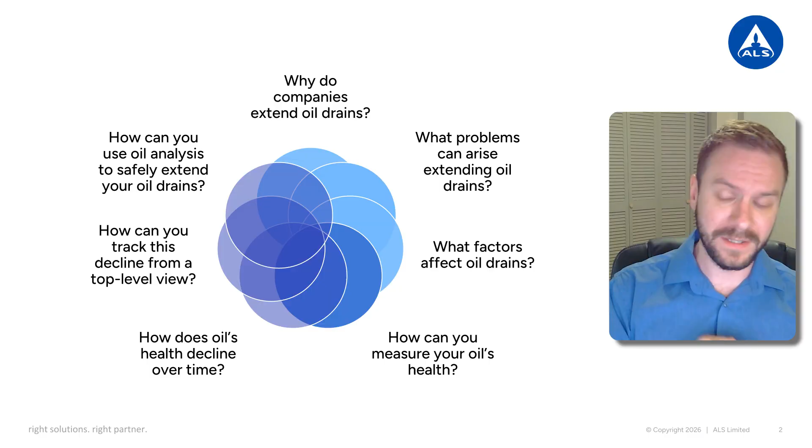But before we get into all of that, we need to touch on a big reason this topic is becoming more prevalent and why you should be paying attention to the topics covered in this webinar. We have heard countless news stories on the price of gasoline since the beginning of the year. It is no secret that the volatility in geopolitics has an effect on gas prices, but an often overlooked area in the media is lubricating oil.

Regardless of the reasoning, price increases at this level would make any company start to consider how to cover costs and overhead in lubricating oils. Indeed, many customers have already been starting a trend towards silently extending their oil drains. Doing so without understanding the mechanisms that limit these extensions, unfortunately, is a recipe for disaster. But there are many reasons one would want to extend their oil drains even outside of the price increases.

For one, it decreases waste disposal costs. Whenever oil is changed out, it must be disposed of in a responsible manner, whether that be through oil recycling or disposal. These oils need to be transported and dealt with. Reduction in the frequency you have to do this is a save on bottom line relatively quickly. Likewise, if you are decreasing the amount of oil you're using, you're going to find the overall cost of your lubricant going down as well.

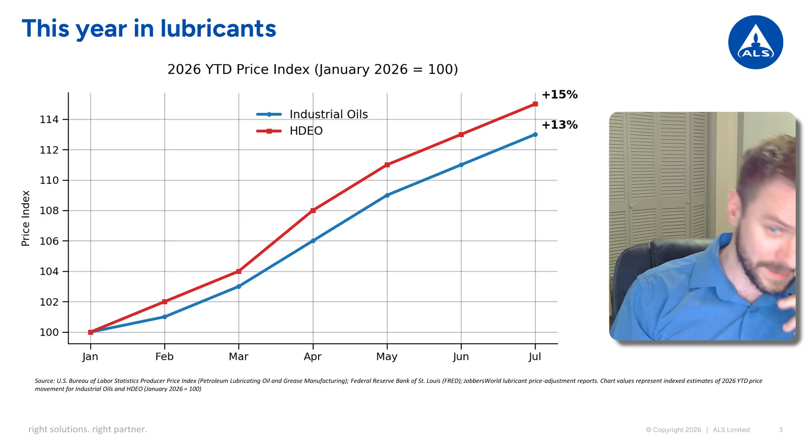Finally, environmental concerns should also be taken into account. If you live in a state, province, or country with carbon footprint regulations, the decrease in oil usage can increase the environmental sustainability of your company. These are just some of the benefits, and we can go into more, but there is somewhat of an elephant in the room: reliability. Increasing drain intervals is a goal that both consumers and oil producers alike strive for, but you cannot increase them indefinitely.

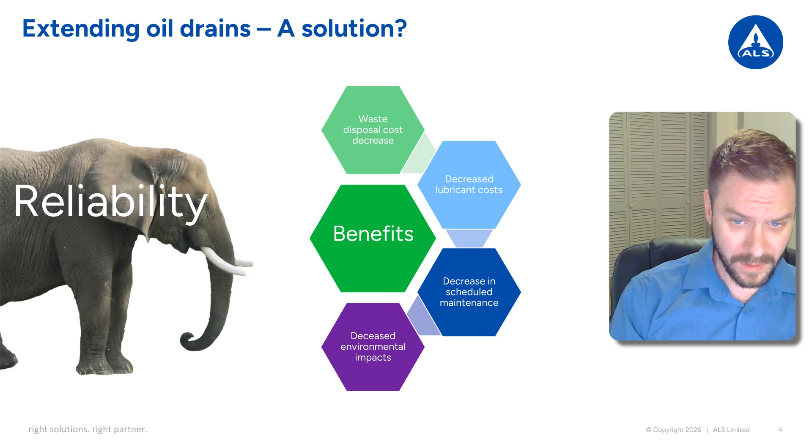Increasing the amount of time the oil is in a unit will increase the stress on that oil and can lead to significant reliability outcomes. Entire units can have their lifespans drastically reduced, and some can even be rendered completely inoperable by overextended oil. So, how can you tell what is going to happen? First, we need to discuss some of the variables that can affect oil drains.

So, number one is operating conditions. Now, let's say you have two trucks. Same type, same engine model, same oil being used, everything is the exact same. The only difference is one is operating in South Georgia and the other one is operating off the coast of Nova Scotia. Now, I'm from South Georgia. I know down here it is humid, it is hot. There's the clay that just gets on everything, and there's more swamps than there are people.

I have not been to Nova Scotia, but I'm going to go out on a limb and say that the operating conditions are going to be a little bit different. Those two trucks, even though they're exactly the same in every regard, except for the fact that they are in different locations, are going to have drastically different stressors that are put on them, and the oil is not going to age at the same rate for either one.

Compartment types are another major area of consideration. You can use the same oil in two different compartment types, and it's going to age differently depending on which one it is. And even if they are the same compartment type, older models can perform very differently from their newer counterparts. It pays to know how your individual equipment works.

Similarly, equipment age has a massive impact on how it performs. A transmission that's just fresh off the factory line is going to be operating at ostensibly peak efficiency, whereas one that's been sitting in your tractor from 1985 is going to behave completely differently.

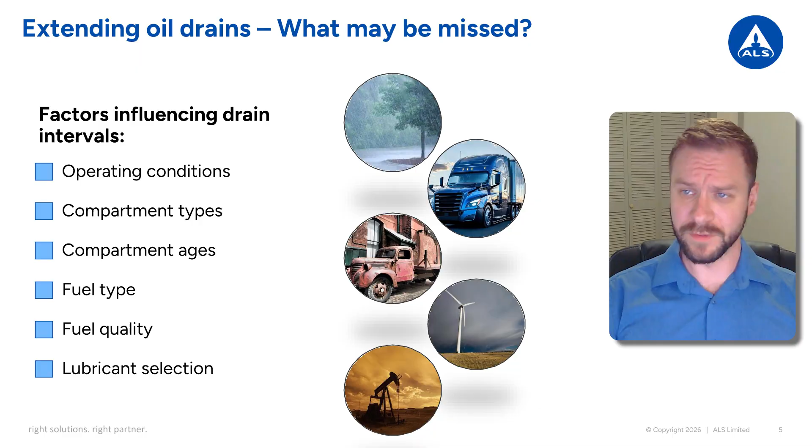And these are just some of the factors influencing how long you can run your oil. There are many, many more, but these are just some of the major factors influencing how long you can run your oil before it wears out. But how can you actually measure your oil's health?

Well, I wouldn't be very good at my job if I didn't promote at least a little bit of oil analysis. Contrary to pretty much every post-apocalyptic movie in existence, oil does age and does have a shelf life. These changes can happen chemically and physically, and I'm sure you've seen the physical ones before with your oil turning black or smelling burnt, something like that. But chemically, a lot of times these changes are hidden from human senses. This is where you have to use oil analysis to confirm your oil's current health.

The big tests in an oil analyst's arsenal for determining oil health are acid number, base number, viscosity, oxidation, and contamination. All of those contribute massively to understanding your oil's longevity, and only when they're taken all as a whole in concert do they paint a clear picture of what is going on in your oil. Now, we're going to go through each one and discuss the mechanisms behind the oil aging, what the tests show, and how you can interpret them.

Well, first up is oxidation. Unfortunately, you guys, my background is in chemistry, so you're going to have a brief refresher, but I'll try to make this as painless as possible. Oxidation, in chemistry terms, can be summarized by the somewhat apropos mnemonic device OIL RIG. So oxidation is losing an electron, reduction is gaining an electron. Now, there's a different interpretation for lubrication, where oxidation is gaining an oxygen and reduction is losing an oxygen.

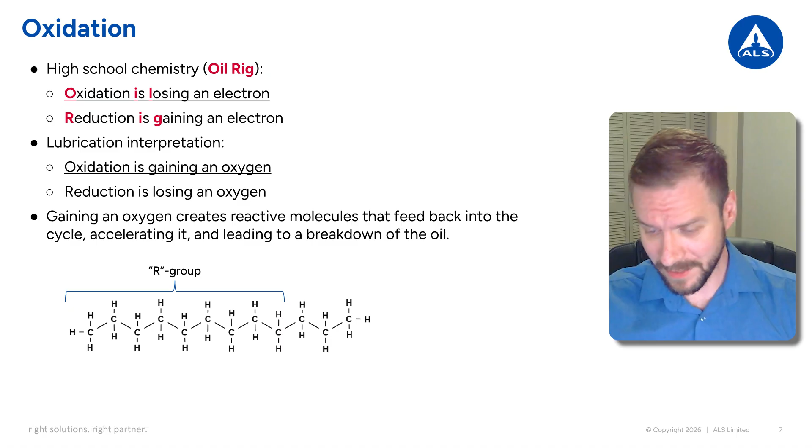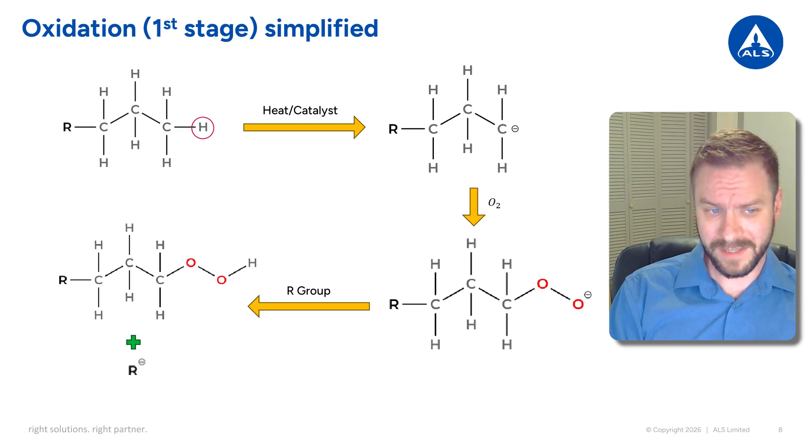From one carbon chain through this first stage of oxidation, you end with a completely different molecule and another reactive radical. So what's going to happen to that reactive radical? It's going to go right back to that first step and propagate the exact same reaction over and over again. And unfortunately for you, this is not the end of the story, because that hydroperoxide that was created, it is not a very stable molecule.

So let's take a look at that hydroperoxide. It's a simple carbon chain with two oxygens and a hydrogen bonded at the end. Some of the more astute chemistry enthusiasts might already kind of see where this is going. Like I said, this hydroperoxide is not very stable, and it will commonly undergo decomposition, which is basically just it breaks apart. Forms new molecules and more different reactive radicals. This can present itself in many different ways, but right now we've got it decomposing into two reactive species.

Remember, both these species in this decomposition have free electrons. They are reactive. They want to bind to things, and they're going to do that. At the end of the second stage of the reaction, you're left with an alcohol, not the fun kind, a chemistry kind, a water molecule, and three more reactive radicals.

So, taking first stage and second stage together, you started with a single carbon chain, and all you needed was heat and oxygen, and you end up with an alcohol, a molecule that does not do what a normal carbon chain does, water, which we know water is not great to be inside of an engine or any compartment, and three reactive radicals. Each of those three reactive radicals is going to do this process again.

So if you're looking at this from an exponential standpoint, one oxidation reaction begets three reactive radicals, which then beget 9, and so on and so forth. This is why oxidation is such a problematic process. It's exponential. It will continue on like this until the carbon chains in your oil are destroyed.

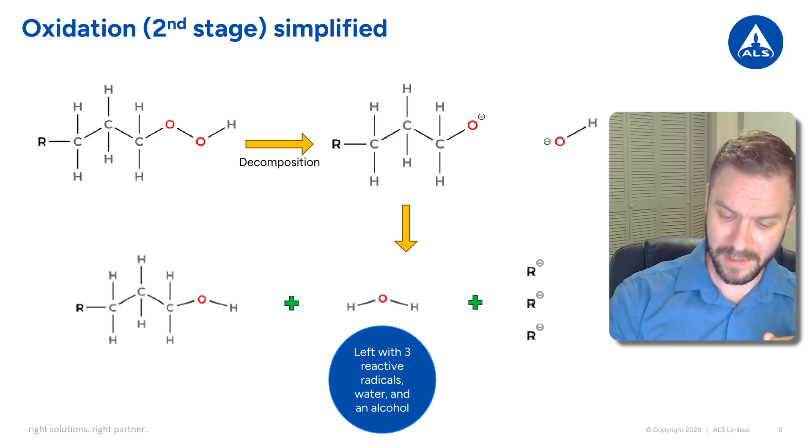Luckily, oil manufacturers have devised ways to delay this process and interrupt the feedback loop. This is accomplished with antioxidants. Antioxidants come in many different forms, but they're there to slow down this reaction. Each type of antioxidant, whether that be primary or secondary, breaks this oxidation reaction at different steps.

Now, I want you to be aware that this does not stop the oxidation reaction. This just breaks a part of the chain. It slows it down. There are still going to be oxidative products and reactive radicals that are formed from this. Antioxidants just slow the process. Another thing to understand about antioxidants is that they are finite. There are only so many that are in an oil.

Now that you know the oxidation reaction, or basically the basic version of it, so what? What does that mean for your oil? I've told you about the reaction, but what is it doing? What is it causing? What are the problems it is causing in your oil? Well, this is where the other tests come in.

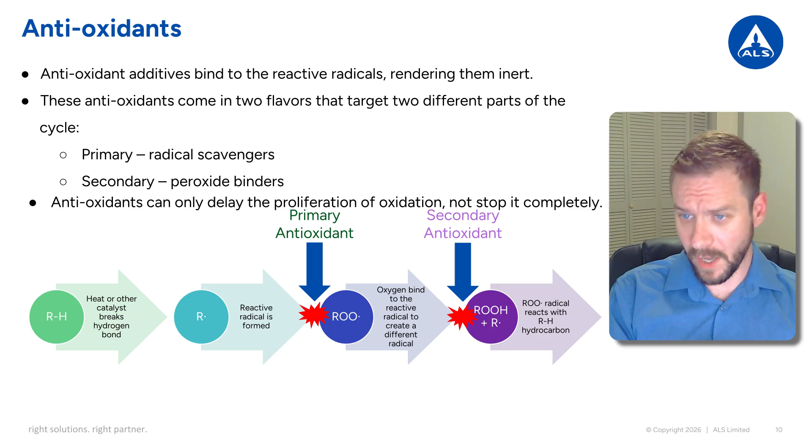First on this list is viscosity. Viscosity is the single most important property of a lubricant. If you learn about oil analysis in any sort of in-depth way, this fact is going to be drilled into your head. Viscosity is important. It is the resistance to flow, but in layman's terms, you can kind of think about this as thickness. So for instance, water is much less viscous than, say, honey. It flows more easily. It has less resistance to this flow.

Now, oil's viscosity does change throughout its lifespan. It can shift up and down depending on environmental factors or chemical changes that are happening, or even just structural changes in the oil itself. But typically, it'll start to increase as the oil ages.

Now, this can be problematic, as every single compartment has a specific range of viscosity that it is supposed to operate in. So if your oil gets too thin, moving parts will suddenly start touching each other. It'll start causing wear. And if it starts to get too thick, you're going to have parts sticking, increased heat generation, resistance, decreased efficiency. So an increase beyond what is acceptable for any component will have negative ramifications for the equipment as a whole. A big reason for this increase in viscosity comes from oxidation.

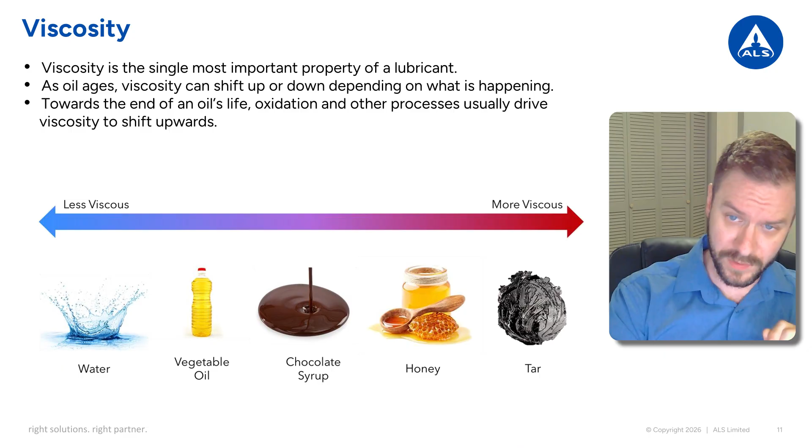Those free electrons still want to bind to things, and if they come in contact with one another, they can form a double bond. When they form that double bond, it basically ties those two carbon chains together and makes a much longer carbon chain overall. It's essentially like spaghetti sticking together. The chains will bind to one another, create a new shape, and they will start becoming more resistant to flow. It'll be longer chains, they'll be connecting in weird ways, getting bound up in one another, and this is where that viscosity increase starts.

And unfortunately for you, this simple binding that I've shown, where you can kind of visualize it as a straight line, is not the only kind that can happen. They can be branching, they can form circular structures, and eventually they can form large complexes. These enormous structures can form, which drastically increases the viscosity of your fluid. Given enough time, these structures made out of these carbon chains can conglomerate, oxidize further, and become varnish and sludge. Those sludge deposits in overextended oil are comprised in part by these large bundles of carbon chains. So not only is oxidation creating these large stranded molecules that increase viscosity, it is also driving the production of varnish and sludge.

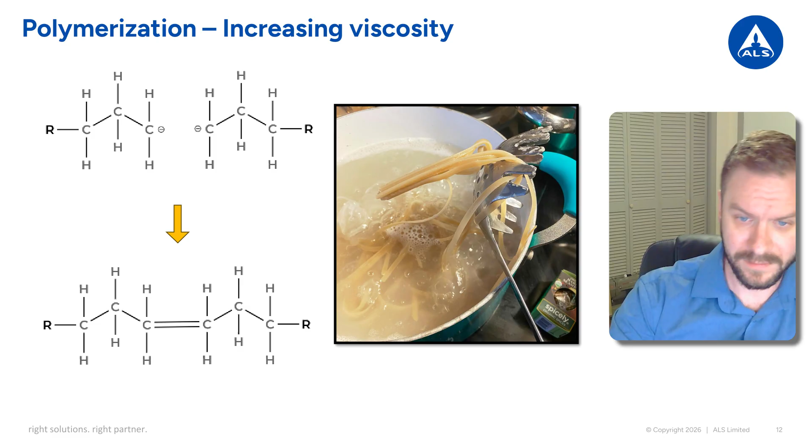Now, even if you're not well versed in chemistry, you kind of know what acids do. They react with metal. Acids react with many different types of metals to form metal salts. And when they do that, it looks like corrosion. It is actively eating away at this metal. For obvious reasons, this is not an ideal chemical to have in your equipment, which is mostly comprised of metal. High acidity can cause corrosion, kickstart other reactions, and continue to contribute to sludge and varnish.

In the lab, we measure these acids as acid number, or AN. This is basically a measurement of the total amount of acids present in the oil. Remember, we can't stop oxidation completely, and we cannot stop acid generation completely. So this acid number will still rise throughout your oil's lifespan, but we can combat it.

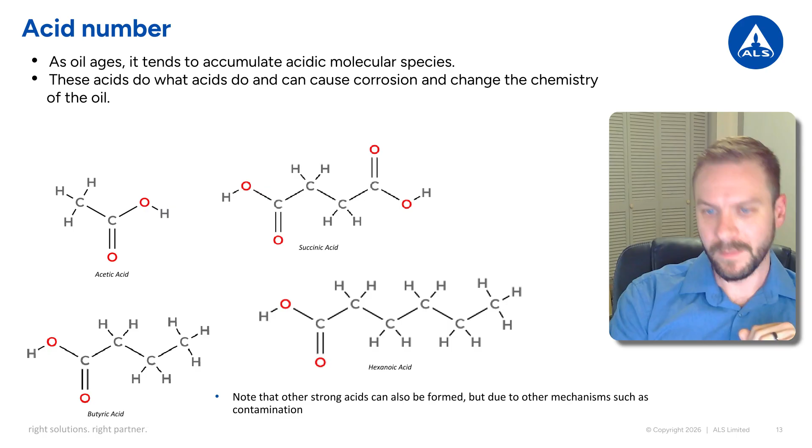And how we combat it is using overbase additives. These are chemical complexes usually based around calcium, magnesium, sodium, and sometimes barium. If you look at oil analysis reports, some of the magnesium and calcium that you see in your additive package is coming from these additives. They're there specifically to bind to those acids and neutralize them, thus balancing the quantity of acids in your oil.

In the lab, we measure these overbase additives, or this alkalinity reserve, with a test called base number, or BN. It's a bit like the reverse of acid number. It can be thought of as the acid neutralizing ability and level in your oil. If you have a high base number, your oil can still neutralize acids.

Now, like antioxidants, they are a finite reserve. There are only so many of them that you can cram into an additive package before they themselves start causing problems. As oil ages, acidic molecules are created, the overbase additive neutralizes them, and is consumed. Over time, you will see a decrease as the base number neutralizes those acids.

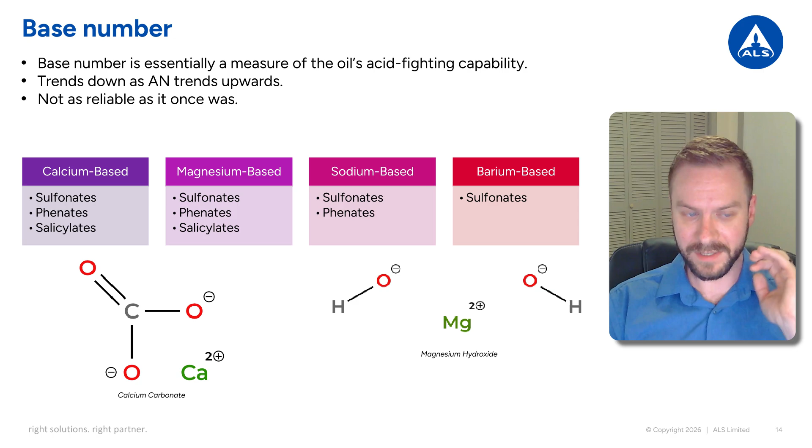As time goes on, those antioxidants are used up, and they reach a concentration at which they can no longer stop the oxidative process as well as they once did. This leads to the oxidation reaction starting to accelerate. It accelerates, more acids are produced, and the base number, which has been working silently in the background, those overbase additives, they start binding to those acids.

Base number starts to drop, acid number starts to skyrocket, and those harmful products of the oxidation reaction start to accumulate. Oxidation rises, acid number rises, base number bottoms out, and viscosity rises. This is how the process proceeds normally.

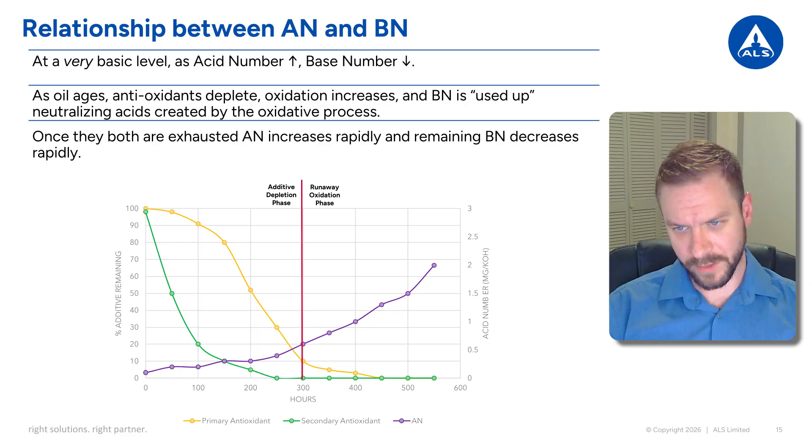But what if there is something in your oil that shouldn't be there? Contaminants throw a spanner into this entire process. What was a nice, easy to understand balance between oil aging and the additives sort of combating that gets completely thrown out the window when a foreign body enters the equation.

Abrasives such as dirt can cause massive amounts of damage to the metal surface inside a component. They strip away metal. But an often neglected part of this is they can also drive the aging of oil. The metal that it shaves off can become a catalyst for that oxidation reaction. It can cause it to speed up. Also, those areas where those abrasives are coming in contact with metal become temperature hotspots, which can also accelerate the oxidative process. Soot can do a very similar thing.

Soot causes hard particles that act like abrasives. Soot can also increase the viscosity, which is going to increase the resistance to flow, increase the friction, increase the temperature in the oil, and drive the oxidative process. Water is the worst one you can possibly have in there. It causes a multitude of reactions and degrades the additives to where they can't do what they are supposed to do.

Other incompatible oil can cause problems as well. If the viscosity is too low, again, you have that metal-on-metal contact from parts that are no longer able to separate. And if it's too high, then you're going to have an issue with temperature increases, viscosity increases. And if you have completely incompatible oil, those additive packages may not play nice with one another and can cause the overall degradation of oil.

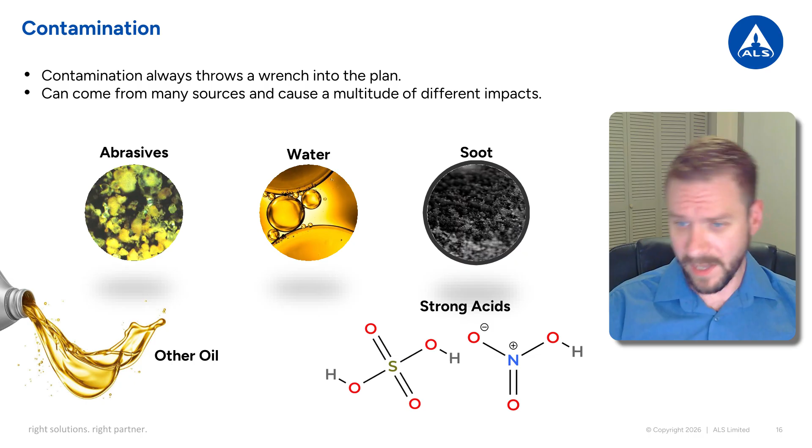But this is all to say that this topic is complicated. There are many different variables that can affect a fluid's health, and the processes that I've shown you here so far are a simplified version of what is actually happening. Now, we do have lab tests to test this. Monitoring those lab tests on a unit-by-unit basis is helpful for that particular unit.

So, when is the optimal time to change the oil? Ideally, you would like to change it immediately before all of those different test results start to become exponential, before that viscosity starts to rise, before that acid number increases, before oxidation runs away. Unfortunately, it's pretty hard to find that sweet spot. Like we talked about at the beginning, there are many factors that can influence the ideal drain interval, and it becomes incredibly difficult to determine unless you can see your data from a bird's eye view.

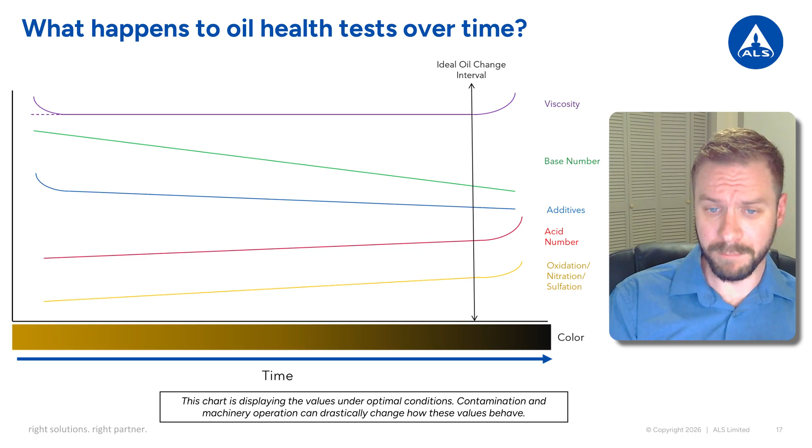Tracking your oil aging from a top-down approach is the best way to determine when the ideal oil drain interval is for your entire fleet. Is it guaranteed to be the best for every single unit? No, but it is good as an overall measure of how your fleet is performing. Doing it from this angle, as opposed to unit by unit, allows you to gain an overall average across the entire fleet and reduce the influence of random variables like contamination.

Tracking all these test result changes can help you narrow down exactly when you hit that sweet spot. That sweet spot's going to allow you to extend your oil drain without causing catastrophic damage to your equipment. Like I said, it may not be perfect for every unit, but it can give you a guideline to apply across every fleet. But how can you do this safely?

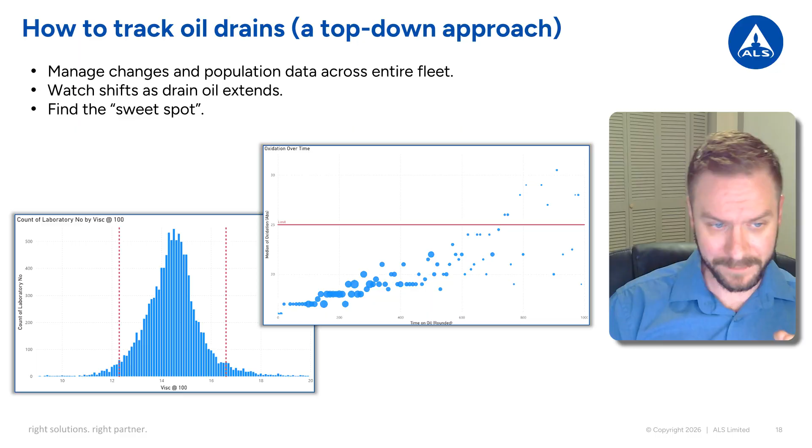Here's a basic pilot project that I have set up. So first, we want to select some units for your study. These units need to be a representative sample of your entire fleet. If you have 3 different sized hydraulics, you need to include each one of those in the study. If you have engines that run 2 different types of oil, you need to include both those types of oil. They need to be a complete representation.

Then you need to go about determining where you currently stand at your current drain interval. Take samples. Look at where the data is right now. Are you already going over your oil drain? Is it already putting too much pressure on the oil? Maybe you can't do this study. Or does this oil look pretty good? It's nowhere near what even the OEM recommends. Maybe you can stretch it out a little bit further. Is there any abnormal wear that is occurring throughout your equipment? These are the things that you have to take into consideration right at the beginning.

After this, you need to determine estimated limits to use for this study. These should be conservative. In other words, you do not want to get to a point where damage is already occurring to your equipment. For example, if you know that your viscosity at 110 centistokes is already causing problems with bearing wear, then you do not want to set your limit at that 110 centistokes. You need to bring it back. Bring it down to a level where you're not causing damage.

Once you have those in place, now it is time to slowly extend your drain. You can do this in small increments. The increments are up to you. It is fully dependent on what you are comfortable with doing. It can be small, like 10%, or you can jump a little bit further than that. The important part is watching those increments and seeing how the oil changes over time.

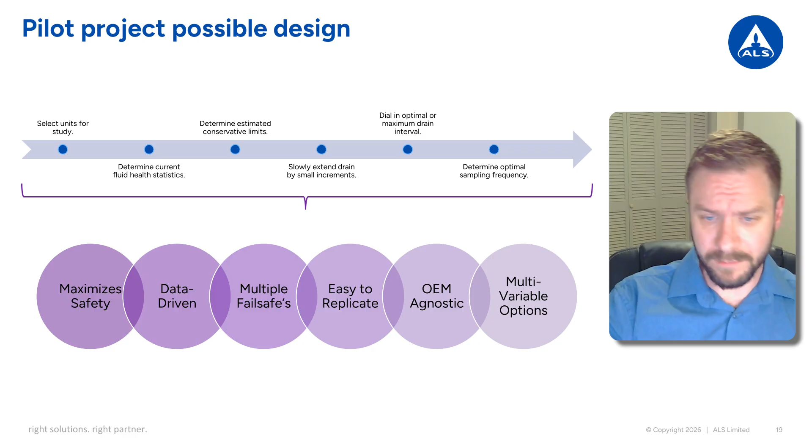This design that I have here is meant to minimize risk, be driven by real data, have multiple fail-safes, and be in control for multiple variables. Beyond this, if applicable to you, you could even move on to condition-based oil changes. Now, this one is not right for every compartment and company, but if it is done effectively, it is the most cost-effective way to perform oil changes.

This setup is somewhat similar to a regular oil drain extension. The big difference here is the endpoint. At an ideal drain interval model, you will still drain at set intervals. Once you've moved to a condition-based system, though, you will only change the oil if the analysis shows the oil has gone over our calculated thresholds. You'll still need to roughly establish where this is going to happen and have maximum allowed time on the oil to mitigate risk, but if performed correctly, this is the best way to manage drain intervals.

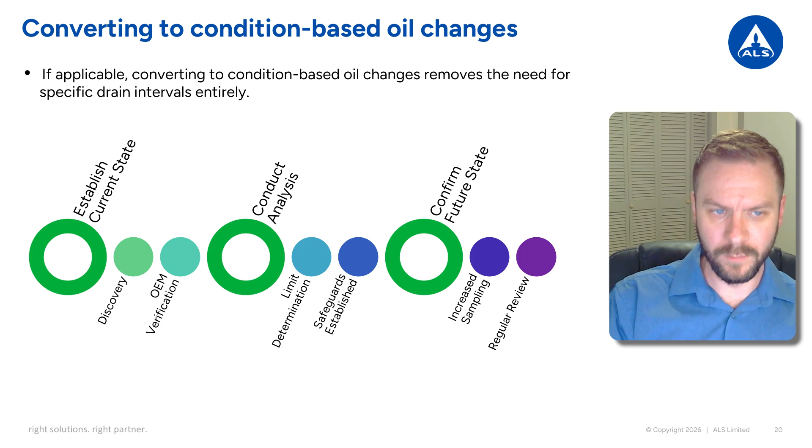Let's look at an example of what one of these kind of projects looks like. Now, a client has been on a simple oil drain interval for many years, but wanted to experiment with a condition-based system with sort of an upper-level oil drain. They selected roughly 100 units for this study. These were comprised of only the specific kind of unit that they wanted to extend this drain interval for. And they started tracking the oil health results over their current drain interval.

Once the initial data was collected, we were able to deduce that at their current drain interval, the oil was not really being put under any stress that it couldn't handle, and we could actually extend the oil drain interval. Setting up the sort of conservative limits we used was pretty tricky, but through a combination of OEM recommendations and data gathered on the fleet, we were able to come up with limits for the fluid tests that we knew would not harm the equipment.

Now, this approach may or may not work for everyone, and the results may not be as dramatic as they are here, but this is the potential power in doing a study like this. Every company is unique. Everyone faces their own specific challenges and pressures, but taking an approach like this allows you to account for those pressures and dial in on the perfect drain interval for you.

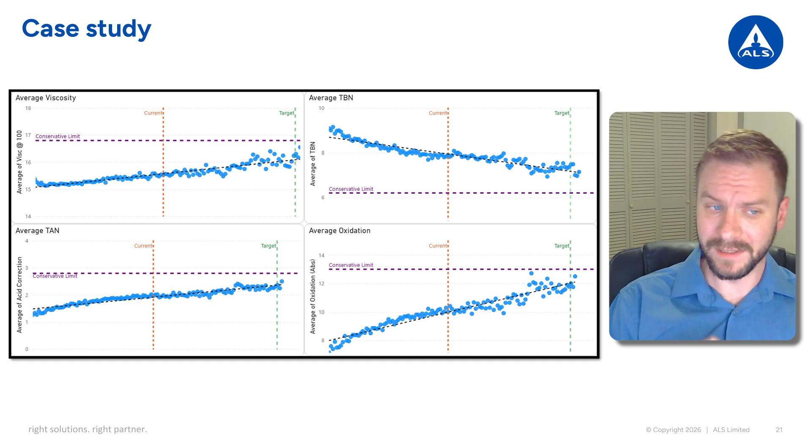So, to summarize, if you are wanting to extend your drain intervals, here's a brief checklist to follow to keep your equipment safe. Figure out what variables will impact your oil, whether that be environmental, fuel type, compartment type. Check with the OEM guidelines. They built and manufactured this stuff, so they probably know what is concerning as far as test results go. You have to establish a quality sampling program and monitor it. Gather that data on the current drain interval. You have a set drain interval already, gather data so you have something to use as a baseline.

Establish a controlled study with the help of an oil analysis provider to try and extend your drain interval. Monitor your oil analysis results and proceed cautiously to reduce overall risk. And continue monitoring even after you've found your ideal drain interval. Just because you've extended it does not mean you should quit sampling. On the contrary, it's even more important now. Finally, if it works for your particular situation, consider switching to condition-based monitoring.